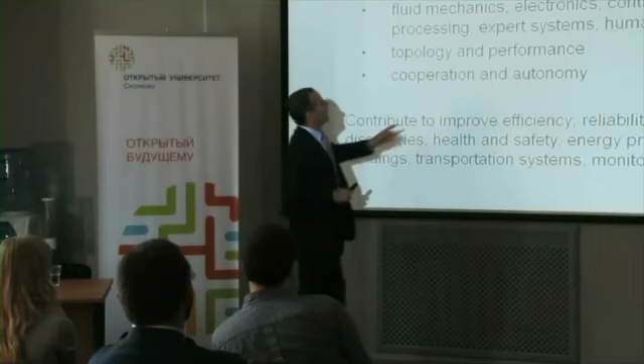And finally, we have to understand that cooperation and autonomy are at opposite sides of the spectrum, but you may have autonomous vehicles which are cooperating all together in order to achieve a common goal. The way we formulate cooperative goals for autonomous vehicles is extremely important, because there is cooperation in space, cooperation in time, and cooperation in space and time. And it is extremely important to understand what type of problems and how to achieve this.

All right, now all these, unlike robotics and autonomous vehicles as they used to be regarded 20 years ago, have to improve efficiency, reliability, availability, the value in scientific discovery, health and safety, so human well-being, production and distribution of energy, smart buildings, transportation systems, medical practice, and so on. So robotics these days has large impacts on the way we live. And whenever I say robotics, I mean a mechanical system with electrical parts, with an interaction with the environment, so a much more complex object than what used to be a robot 20 years ago.

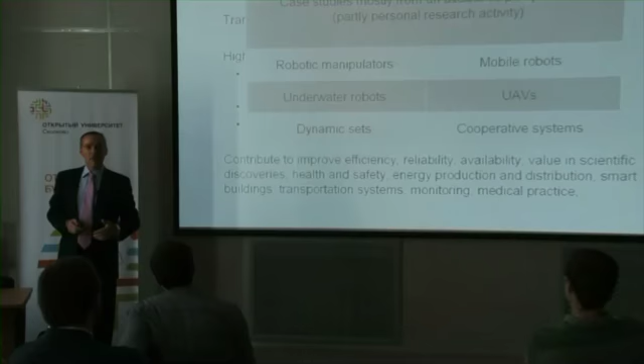Now the talk is essentially based on case studies, mostly from an academic perspective. I'm an academic, and partly on personal research activity, so I've contributed to the development of some of the applications we're going to see. We are going to discuss robot manipulators, mobile robots, underwater robots, autonomous vehicles, and at the end cooperative systems. The first four are somewhat autonomous systems. Then we'll look at an abstract way of defining a cooperative system, and then at a new application called dynamic sets.

To give you an initial idea of what a dynamic set is, think of the clouds. The clouds are moving in space, and they are essentially sets moving. It looks very far-fetched, but we'll come back to these clouds later on. You would like to understand the way clouds behave, for example. But they don't have to be clouds. They may be flocks of birds. You may have an oil spill in the ocean, and you want to understand the way it behaves, or the way a bushfire, which is another set, behaves. Most of these systems are autonomous, but we would like to understand the way they behave.

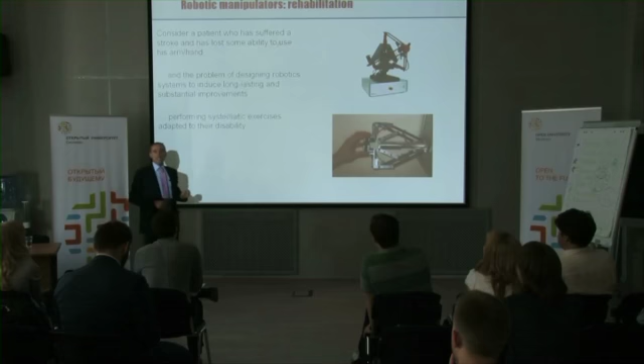Now robotics, robotic manipulators. This is the simplest possible class of robots. But while robots used to be considered simple robots for pick-and-place operations, nowadays robots can be used for much more interesting and much more useful applications.

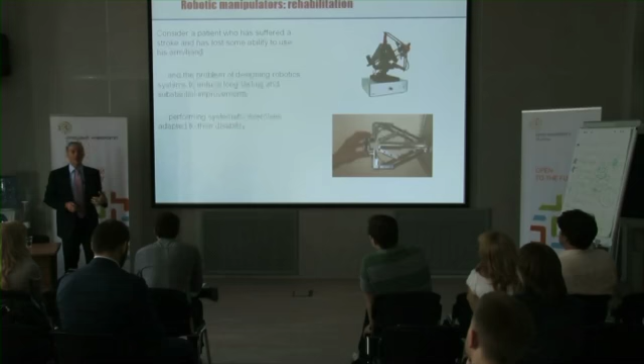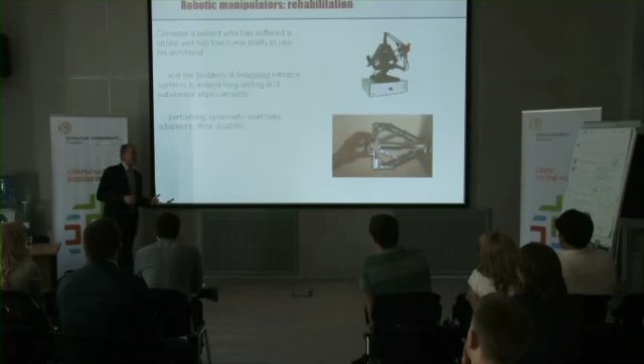Now, suppose that you have a patient that has suffered a stroke, for example, and has to undergo rehabilitation. Now, what happens typically? You have the patient, he has to go to some place, have rehabilitation, and come back. It has actually been shown that the time and effort that the patient has to take to go to rehabilitation and come back, most of the time, is such that the positive effect of the rehabilitation is almost zero.

For example, if you have a problem with your back, you drive 1 hour, you go there, you have physiotherapy, you go back home for another hour driving, and so you wasted your time, because all the time that you have been in your car driving has been bad for your back despite the rehabilitation.

So we want to devise now a little tiny object that you go to your doctor, the doctor will give you, you take it home, like the coffee machine. In the morning you wake up, you have your coffee and you have your rehabilitation. Okay? So this is a type of rehabilitation, which is a very simple robot, where you can put your hand, and this robot will initially move your hand.

So, for example, if you have some problem and you need to start again moving your hand because of an accident and so on, the robot will initially move your hand, and then will sense the force that is applied by your hand to the robot, and eventually what happens, you will move the robot. Okay? So there is a very clear interaction between the robot and the environment.

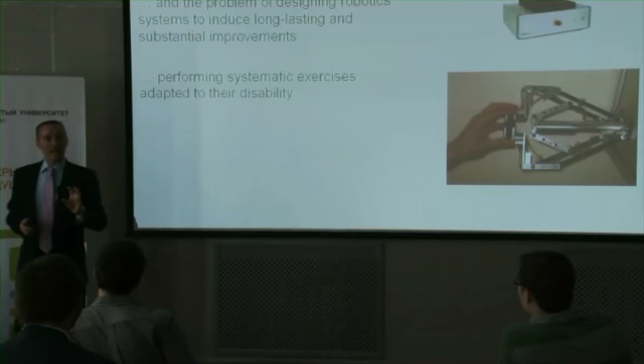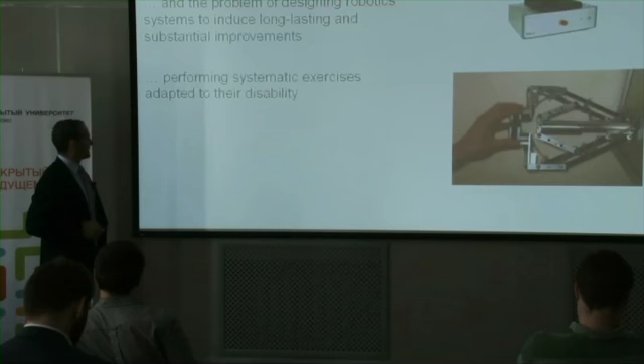The robot will initially be driving your hand because you have no force in your hand, and as you progress with your rehabilitation, then you will be able to drive back the robot. And the robot will be devised in such a way that you can repeat an experiment several times, and in this way you sort of have your rehabilitation at home or wherever you want, in the office, for example, and you don't lose the good effect of this rehabilitation.

So this is the simplest possible example that I can think of a very simple mechanical system. You see, this is actually very simply built, that actually requires a very sophisticated interaction with the environment. You have to be extremely gentle at the beginning if you want to have some success in the rehabilitation, and on the other hand, you want to be able to measure the progress that you are making in your rehabilitation.

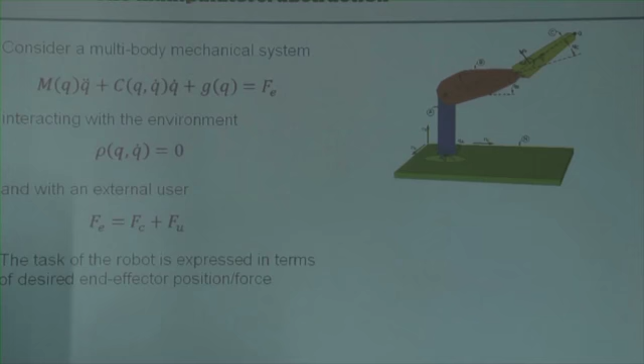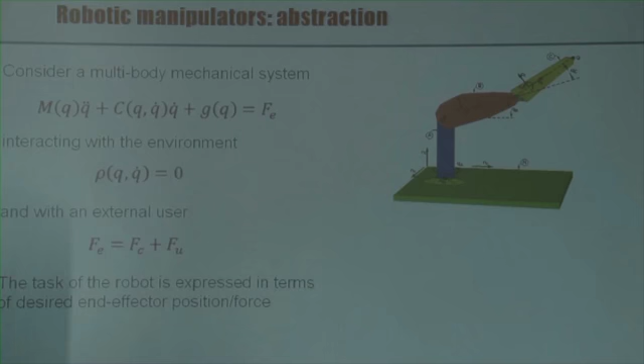So you can touch this table, but you cannot go underneath the table. You can go at some speed, but not all speeds are allowed. And so you have a certain number of constraints which are sort of specifying the type of interaction that you have with the environment. Now, if you want to be able to apply a force at some point, for example, as you touch a table, if you want to draw on the table, you should be able to touch it, to apply a force, but this force should not be too much, otherwise you break your pencil, for example.

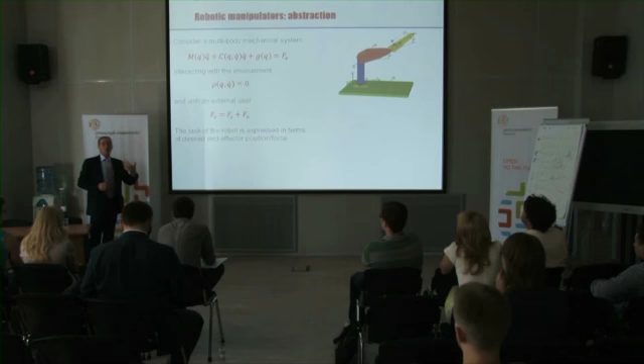Okay, so there are external forces, so Fe are all the external forces, and you can divide these forces into forces which are sort of the control forces and forces which are given by the user. Okay, so in the case of the robot that we have seen before, there may be control loops which are generating forces, and there may be forces which are generated by the user. If you have a mobile robot approaching you and you want to push it away, you want to be stronger than the mobile robot if this is a domestic robot, because you have to be able to avoid, for example, having an accident. Okay?

Now, the task of the robot is typically expressed in terms of a desired position or force for the end effector, which is, in this case, the tip of the robot. In the previous case, you get desired position, velocities, and trajectory and forces for this part here. Okay? So you want to be able to feel that there is a force applied to the robot, and the robot will apply a force back, and you want to be able to move this part in a very specific way. For example, you may want to have rotation orthogonal to the plane. So this is the way you formulate the problem.

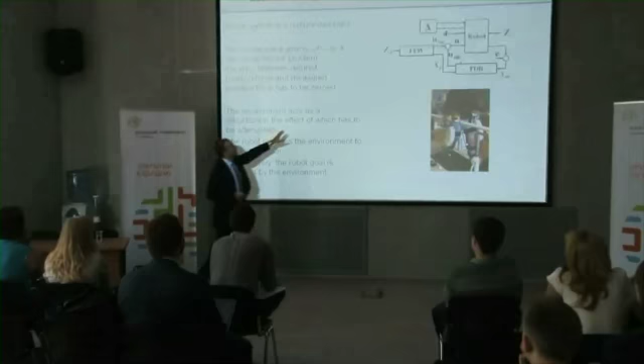And then you have a task, Z, which is the actual task, and ZD is the desired task. And then typically you would implement a feedback loop, which is processing available measurements on your robot and generating a control signal. But then you also have a feed-forward controller. The feed-forward controller essentially will tell the robot what to do in the case that the big delta and the D are identically equal to 0. So if the robot is on the right track, then there's no need for feedback. Feedback is only to adjust performance as you go along. So the goal of the controller is essentially to drive to 0 the difference between Z and ZD. Okay, so this is a very simple problem from a mathematical point of view that we can formulate in a very clean and neat way.

There are two important issues here. First of all, we should be able to solve this problem, but for robots, which are reasonably gentle dynamical systems, it's easy to solve this type of problem. What is actually extremely important is to understand what ZD should be. What is the desired behavior of your robot? It's not only pick and place or move from here to there. The robot should do a lot of other things, should be able to communicate, avoid obstacles, interact with the environment and be useful to the environment, measure what happens in the environment and give information back. So this is mostly encoded in ZD, but it's extremely difficult to understand how to model ZD.

So as a control engineer, I would design the feedback controller, not even the feed-forward controller, but then I need, for example, a sociologist to tell me that if I want to have this useful to a little child that wants to learn how to interact with a pet, then it should behave in a certain way. So a sociologist should tell me how ZD should be defined for this particular application. A medical doctor should tell me how ZD should be defined for this particular application. I want to help a person to start walking again, who may have had an accident.

Now, what happens is that I want to use a robot. You see, this is essentially a robot arm, in such a way that I move the legs as long as this person is not able to move them. But then I have to be able to understand the maximum amount of force that you can use, and when there is a force applied by the patient, what you have to do.

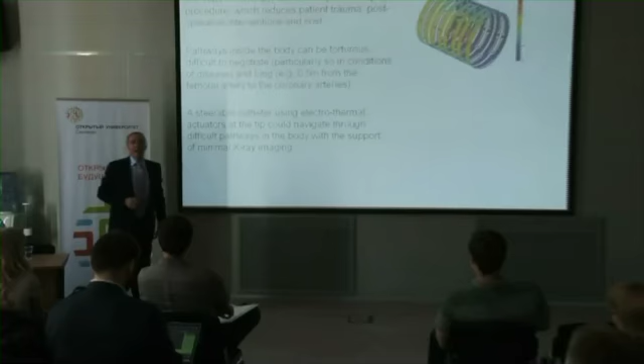Okay, so this is the application that I was discussing at the very beginning, the small application. We have a project at Imperial that is actually dealing with this type of application. This is used in a surgical procedure, and it's actually known that most of the recovery time after surgery is associated with the fact that they've opened you, essentially. So if we are able to perform surgery inside the body without opening the patient too much, but just make a so-called keyhole surgical procedure, then we will reduce trauma, post-operative intervention, and cost. This is extremely important these days.

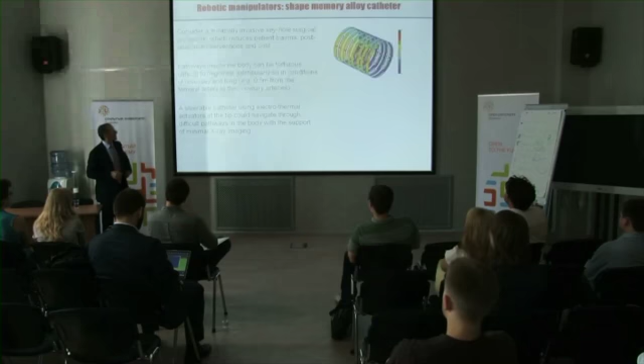Now, the problem is that you should be able to navigate these objects in the body, and typically the access points are in your legs, where you can take an artery, for example, and you want to navigate all the way along this artery for half a meter, for example, to the coronary arteries. Now, you would like to generate a steerable catheter which uses electrothermal actuators. So this is a little wire that will move as you apply currents, because you heat this wire, and as you heat this wire, you generate deformation. And on top of this, the deformation is sort of memorized by this object.

So if you want to navigate along a bend, you initially move in one direction, but then you stay in this direction because you have to move along this direction. So this is extremely important, and you can achieve this goal simply by applying tiny little currents along these wires and then controlling the temperature. The difference in temperature is actually not that big in order to achieve this type of trajectory, because you don't want to hurt the patient.

And so this is actually implementable through a robot, in the so-called master-slave operation. The surgeon will have something like a pen in his hand, and with this pen, he will control the robot, and the robot will essentially follow the path that the surgeon is giving to the pen. This is important because if you think what you are doing while you're trying to insert a wire into a pipe, this is the type of operation that you're trying to do. You're trying to steer your wire, and this is precisely what the surgeon is doing.

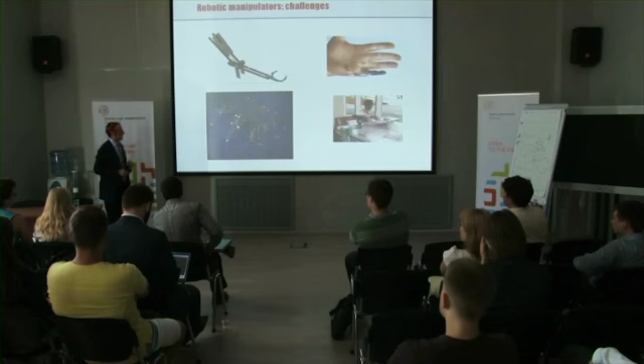Now, we were talking about tactile feedback. This is actually a very new thing and a very important thing, because you would like to have a feeling that you touch the robot and the robot would like to have exactly the same feeling. And this is extremely important because you may have surgical telepresence, so the operator may be halfway around the globe and may move a robot, and then with a proper communication link, you may be able to do operations in some other place.

You may be able to do interaction with holograms, and you may be able to do e-commerce. We all buy on the network these days. But for example, you want to buy a jacket, and you don't want to see only the color, but you want to touch it. Okay, you want to feel the fabric. So this is actually possible.

I mean, you can sort of have a glove, and it looks like you are touching, but the thing is somewhere else. You don't even know where it is actually. Okay, and of course, preliminary objects are these iPhone or smartphone types of things. A lot of games.

If you think of video gaming, when I was a boy, video gaming was a tiny little thing that you had in your hand. You were sitting alone on the sofa playing the game all day. Now, these days with the Xbox or the Wii, you are jumping all over the place with a lot of other people and so on. So this has changed significantly because you have this feedback.

Okay, so because these robots are able to understand where you are, you have a sort of tactile feedback, and you can use this type of interaction. So these are two examples of haptic interfaces. One is to drive a car. So you are driving this car, but you are not there.

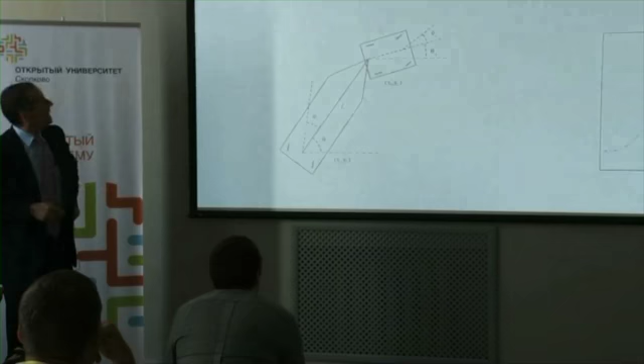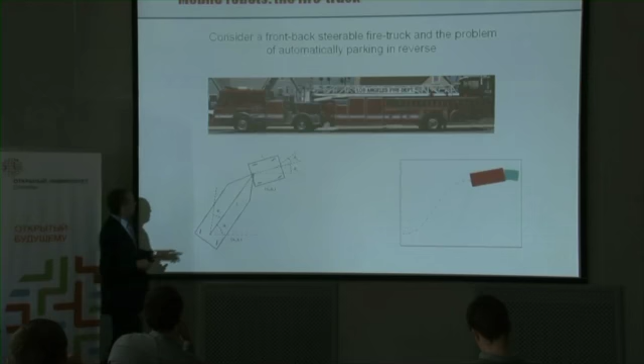Okay, now the second part is mobile robots. So a very interesting type of mobile robot is this American fire truck. Why is it very interesting? Because this is so big that you can steer the wheels here and you can steer the wheels here. So this is very good because if you want to go around streets with such a huge vehicle, it's extremely useful to be able to steer these wheels. So in practice it is to help you steer along the road.

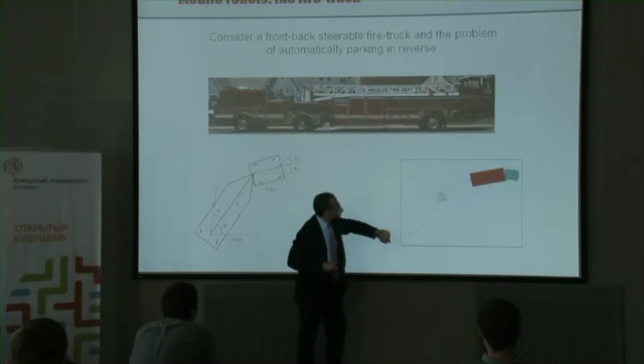On the other hand, driving something which has steerable wheels, fixed wheels, and steerable wheels is extremely difficult. And the type of motion that you have for this system is actually very unnatural. So if we could please play this video, you'll see that it goes on the way back in a very unnatural way. It's not the way you would go with a lorry where you cannot steer this; it's very unnatural.

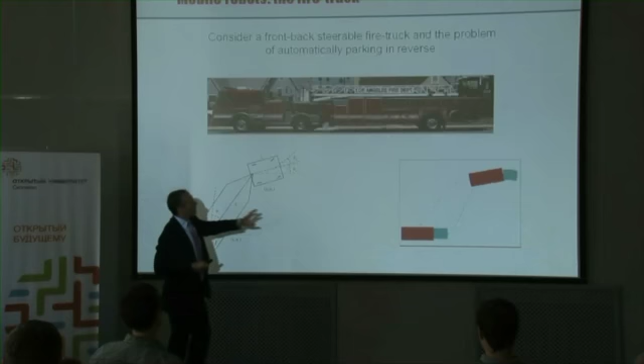And this means that typically there is an operator driving here and an operator driving there, and they have to communicate with each other, and they have to be very smart and very experienced in order to park this type of object. On the other hand, you can park this automatically. You can design a controller that does this automatically, which makes use of a differential model of this system, typically a kinematic model because this is a geometrical problem, and from this differential model you find the controller.

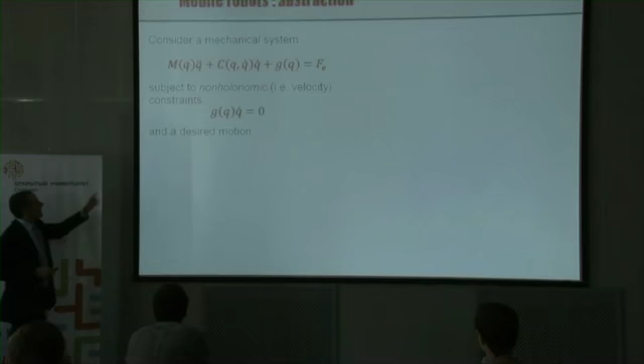Now, how do you describe this? Well, the mechanical part is pretty much the same, but the type of constraints that you have for mobile robots are completely different, because for mobile robots you have so-called velocity non-holonomic constraints, which means you're not constrained in the type of configuration that you can reach, but you are constrained in the way you move. When you want to park the car, we all know very well that you cannot just park it sideways.

There is a constraint, which is a velocity constraint. With your car, you could go wherever you want, but you cannot go wherever you want with every possible trajectory. There are feasible trajectories which are satisfying these constraints, and there are trajectories which are not feasible. Typically, the type of constraint is that the velocity orthogonal to the wheels should be identically equal to 0. But since you steer the wheels, this is a constraint that will change as you change the

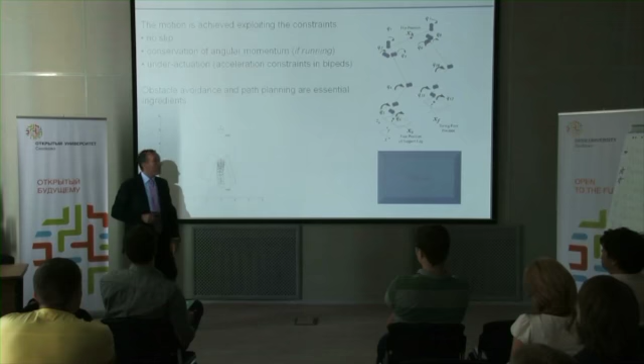If you have a walking robot, so you don't jump, you always have feet on the ground, what happens is that here you have a constraint. This foot has to be on the ground. And on the other hand, this is completely free. So you see that you have a kind of manipulator, a robot with a lot of links, where you have a constraint on the acceleration on this foot. But then as you do a step, everything changes, because the constraint now is on the other foot and so on. So you have what is called under-actuation, because there's something that you cannot move. There's something that has to be on the ground. So this is a very simple example of a mobile robot.

Could you please play this video? Yeah, okay. No? Okay. Sorry. Click again, click, yeah, okay.

All right, so this is a walking robot that has been developed at the University of Michigan. And actually this robot has won... you can take the volume off.

So this robot has won the prize for the fastest walking robot that has been designed. This robot is very heavy on the torso and very light on the leg, because we probably all know from experience that you can walk very fast if you have a lot of weight, for example, if you have a rucksack, but it's very difficult to walk very fast if you have very heavy legs. I mean, if you put skiing boots on your feet and you try to run, then you really have a problem.

Okay, so it is important to have this type of configuration if you have a walking robot. Now, the lateral support that you have for the robot was simply because you're not interested in the lateral motion of the robot, but only in this motion.

Now, the other important thing that you want to do is obstacle avoidance and path planning, because it's all very well to say that I have a starting position and a final position, but all of a sudden I have some obstacle. And this obstacle may be time varying. Someone may be shifting a chair, maybe moving something. So your robot will try to go from here to there. If it's a robot that has a few sensors, it won't hit the obstacle, which is good, but will not be able to know what to do.

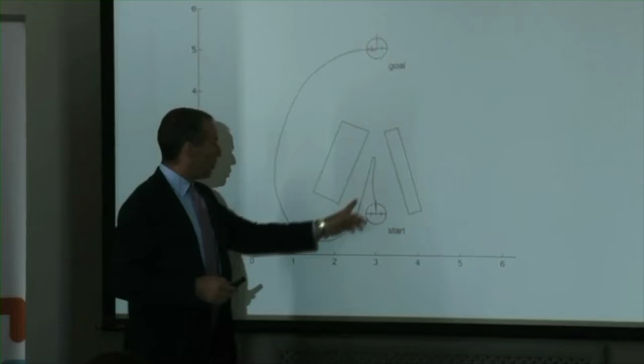But then this notion of distance has to be changed as you move in the presence of an obstacle, because the obstacle will generate, for example, if you have some sensor, a signal that you have to use in order to modify the notion of distance. So if you are close to these two obstacles, even if physically close, you're actually very far away because you have the effect of the proximity to the obstacles. So your robot should be able to get closer to the final goal while navigating away from the obstacle, and it will do something like this. And you can do this in a much more sophisticated way as you get more and more complex tasks.

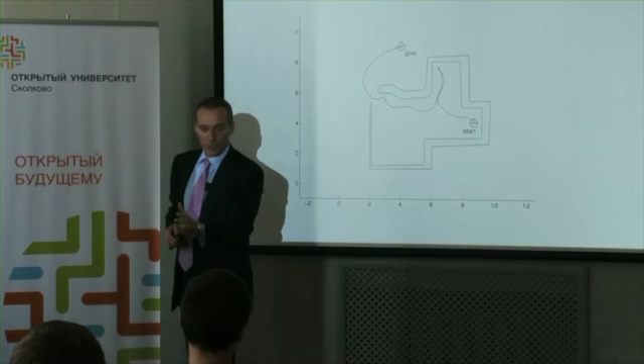The robot will initially try to go along this straight line. Of course, there will be some noise because of the sensing, and then it will be tricked into this position, but then it will figure out that there is no way out and will come back. All this is autonomous. You only tell the robot that you want to go from here to there, and you have three sensors, one in front, one to the left, one to the right, that are telling you whether you are close to an obstacle. You have only three sensors because this robot only goes forward, it doesn't go back.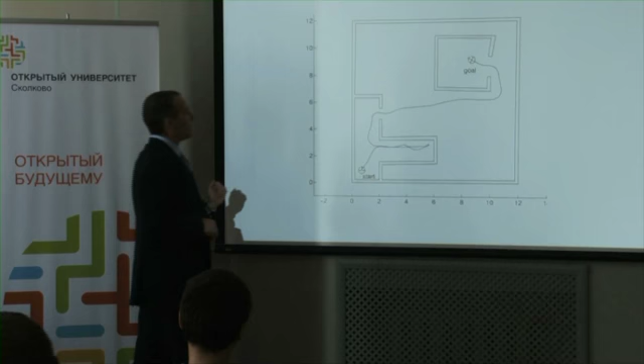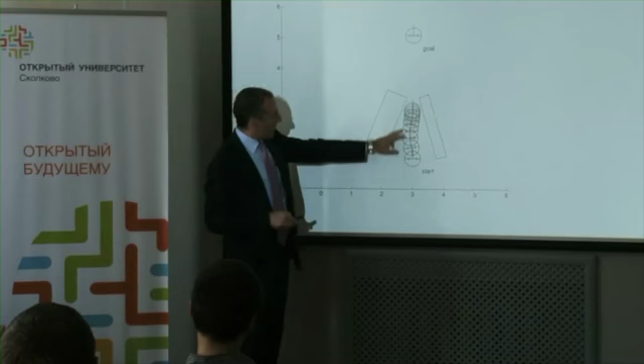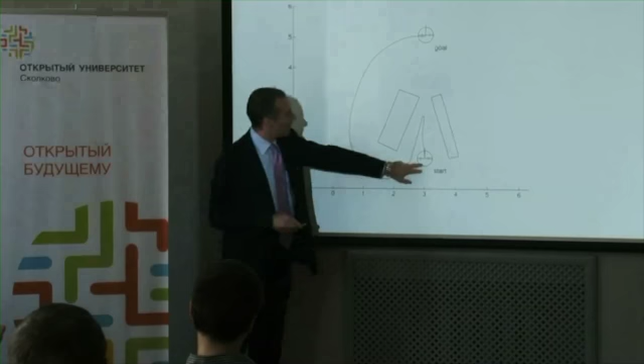And then you have a slightly more sophisticated task, and a slightly more sophisticated task, and finally you have this type of task. Okay? But now you would think, okay, this is an academic example, and of course you can devise a controller that achieves this goal. Keep in mind that from this situation to this situation, we have modified the controller. We have defined a new notion of distance, which takes into account the effect of the environment on the distance. But from here to there, we have not modified anything. It's always the same robot, always the same type of controller. So the robot is able to understand that there is a dead end, come all the way back and achieve the goal.

Okay, actually there are so-called micro mouse competitions, which are for students your age or even younger. So the problem is to devise mobile robots, mice, to compete against each other to solve a 16 by 16 maze in the shortest time. You have no information on the maze. You only know that it's 16 by 16, and you can use whatever you want.

So if we can play these two videos together, this one and this one. So you see, okay, forget the music. And okay, we play the other as well. Sorry, can you play this as well? Sorry.

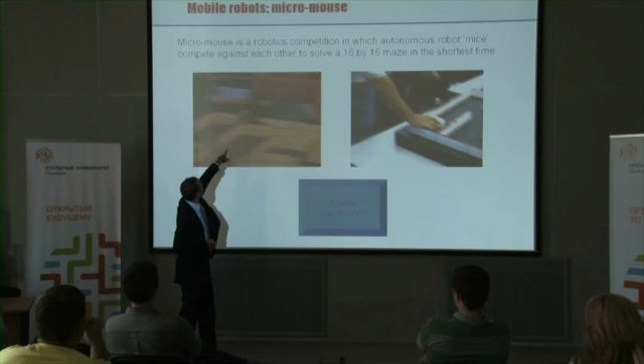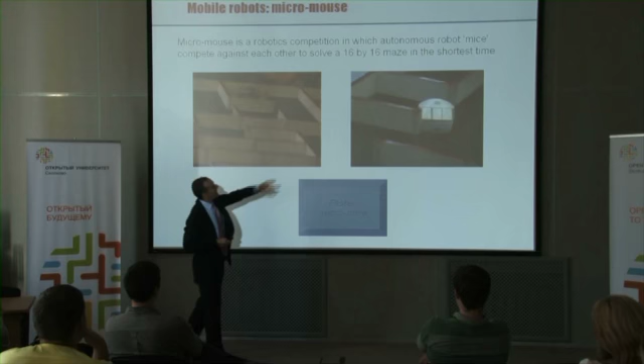Okay, so this one is actually trying to follow all walls. This is actually a mouse, an old computer mouse, as you can see. So it's a real micro mouse, if you think of it. And the behavior is pretty much the same. I would say that in both cases we have very poor design.

Okay, sorry, stop and play this one now.

Okay. All right, so these are actual, much more sophisticated mice. Unfortunately, the quality of the video is not that good, and you cannot even see this micro mouse. And it reaches the goal in 11 seconds. Okay, and if we are patient, then let's see. This one actually is not that good.

All right, so you see that it's going everywhere. Okay, sort of a complete search. It's a very fast mouse, but not very smart. Okay, so you see that it's going inside all of them because the center is somewhere there. You see, that's not good. It will try, and then it will find the right opening and reach the goal after that.

You see, so it's essentially tried them all. It's not very smart, it's very quick. Okay, so now it's gonna make it. And you see that this mouse is very good on diagonals, it's not very good on straights. Yeah, so it's back where it was before, but now it gets a bit smarter. It's learned a bit of a lesson.

So we cannot really see it. Where is it? Yeah, here it is. Now it will navigate inside. It has to take this, yeah? All right, now it's good. Okay. Now the next one will probably take 5 seconds, or probably 8 seconds. So it is really amazing.

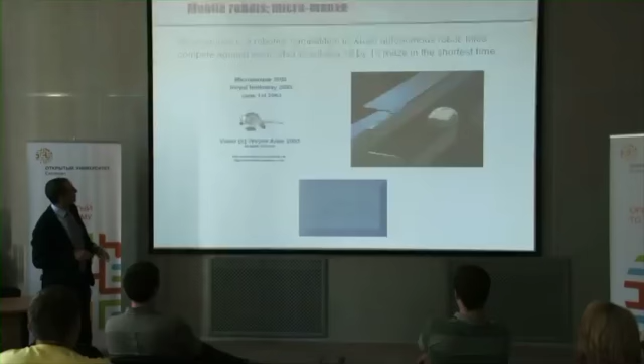Okay, you can stop and go back to the slide. Oh, sorry, no. Next slide. Yeah.

Okay. Right, now, mobile robots. So, we have seen a game, this micro mouse competition, but actually they can be useful in a lot of other applications. So, one robot that I personally designed with the help of a lot of colleagues is a robot for a data center. Now, in Rome, there are several data centers, but the one that is taking care of the Italian railway system, and you shouldn't blame me if the railway system is not efficient in Italy,

is composed of 12 rooms. Each room contains approximately 6,000 servers, and each room is much bigger than this room, but they are in corridors, and you have 6 servers per pile, so you have 1,000 piles of servers for each room. And then what happens is that during summer it gets very hot, and you want to use air conditioning in a very good way. Now, to use air conditioning in a very good way, you need to measure the temperature of each one of the servers.

Now, the dumb approach to this is to have 6,000 sensors to measure the temperature throughout. But actually you don't really need the temperature every couple of seconds for each server, you just need a robot which will go around and will measure all the temperatures. Now, you really have large temperature variation in this type of room, and if you use air conditioning in a very good way, you can save hundreds of thousands of euros a year. So this is a very worthwhile application.

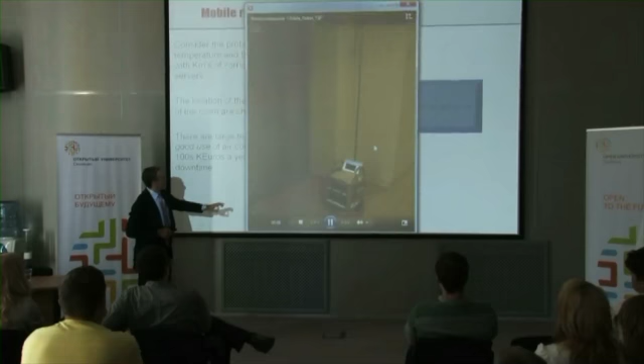Okay, so this is completely built in the university. So it's a very small mobile robot, and the black path is the path that it has to follow. Why follow a path? You could use a GPS. Why don't you want to use GPS? Because you will have a lot of interference. You don't want to have Bluetooth, you don't want to have anything like this because you have all these servers which are running there.

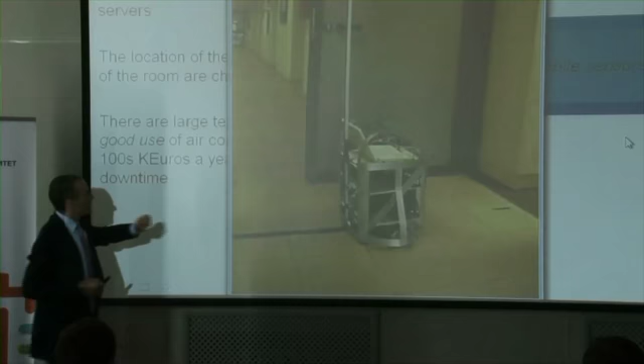Now you have to keep in mind that for this application it doesn't make sense to have a very fast robot, because a very good temperature sensor will actually measure temperatures in 10 seconds. Because you have the temperature of the air, you have to take care of the fact that you reach the steady state and so on. So it's important to have a very good temperature sensor, but then you have to be slow, because if you move, the temperature sensor will not reach steady state, and then what you measure doesn't make sense anymore.

Okay, so let's go to new slides, please. Now, another important problem in robot control is to understand where you are. So you have a robot moving in an environment, and typically you have information from a camera. You can see your robot, but you want to understand how far away this robot is. So this is called the range identification problem, where you have 3D information. The robot is somewhere in space, but you have 2D. You want to reconstruct 3D information from 2D information.

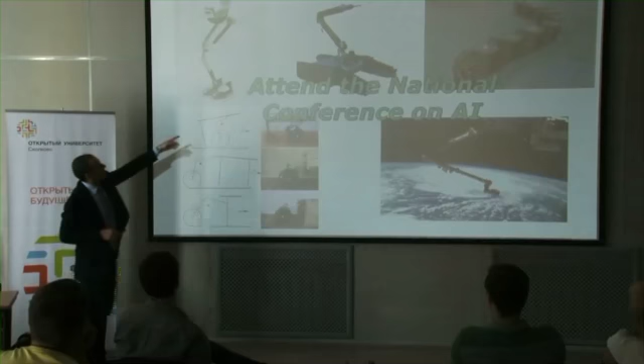Okay, now what are the challenges in mobile robots? So you want to build mobile robots for all sorts of applications. So these are rescue robots, both of them. Then a mobile robot is pretty much like a robot in space, because while for a mobile robot you have velocity constraints, also here you have velocity constraints and conservation of angular momentum and lots of types of conservation. Then you would like to have domestic robots.

You want to close a drawer, you want to shift a table, you want to shift a box. Then you would like your robot to help you with this task. Again, this is very useful if you have an elderly person at home and they're not able to perform very simple tasks, for example, to move a table or to shift something, and so the robot may help you.

And now there is an international goal, which is to have a robot which is able to attend a national conference on artificial intelligence. So the robot should go there, should register. If you go on the web, there is a long list of specifications that this robot should be able to achieve. And one of them is to attend lectures and ask questions. Now, this is probably a bit far-fetched, but it is the goal that we want to achieve.

So, as a summary for mobile robots, we have expert systems, artificial intelligence, communication, control, smart sensors, and so on, an interplay between all these disciplines, and the beneficiaries are again medical robotics, exploration, monitoring, rescue operations, manufacturing industry, smart buildings. You want to measure temperature and the environment.

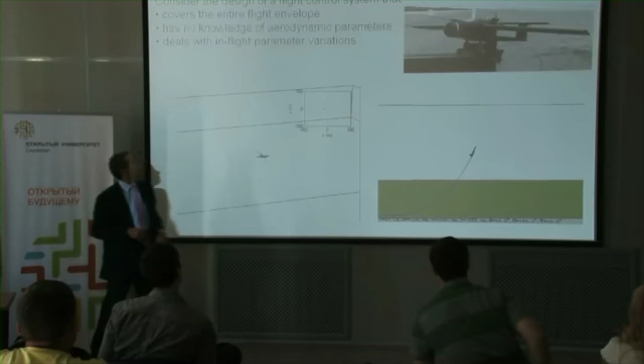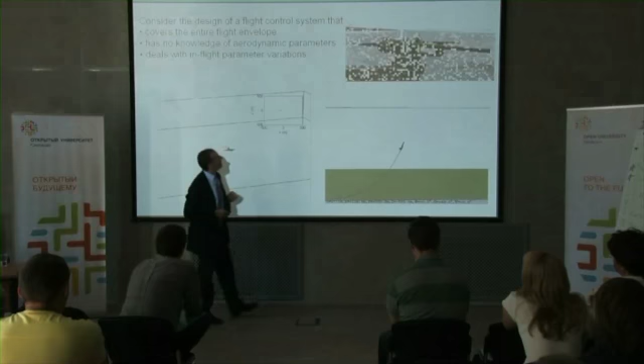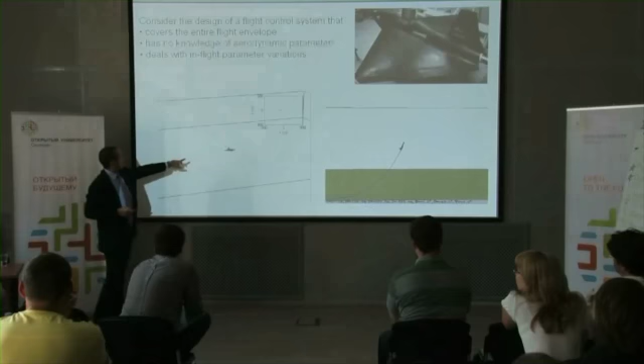Okay, now the next step is flying objects, autonomous vehicles. So suppose that I want to design a controller that works for this type of small model, which is an XRA 140. It's not even able to take off, so essentially you have to launch this aircraft and then it will fly, or for the Eclipse type of aircraft that is developed by British Aerospace. So these can be even used in military action or in rescue operations. Now, there are a couple of challenges, so if you can play both the videos at the same time, please.

So you want to be able to navigate across an obstacle without knowledge of specifics of the obstacle, but at some point you would like to have a change in your attitude. So you don't want to have any overshoot. Now the other objective that you want to achieve, can you play this left video, please?

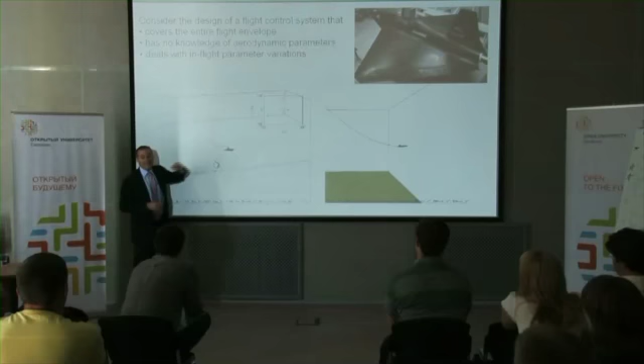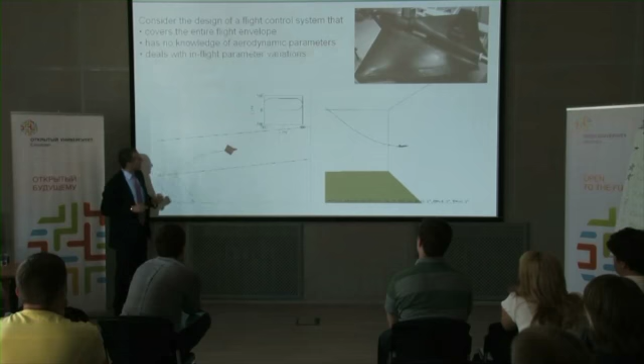Yeah. Okay, so you want to take off with the same controller. Then you are at some altitude. You have a bend, 180-degree roll. Of course, you don't want to fly on this plane. And then it will resume normal flight and will have a very sharp figure-8 type of trajectory. So you go back where you took off, and then you have this type of behavior.

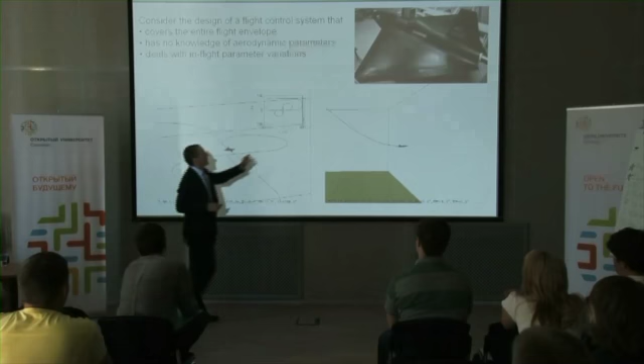All this has to be achieved with a unique controller. Okay, so you don't want to have gain scheduling, you don't want to have several controllers, but you want to have a unique controller. In addition, you would like to have a unique controller for this object, for the other object, and you would like to have a unique controller for all types of aircraft. How is this possible? Okay, let's try to go back to the specifics of the problem.

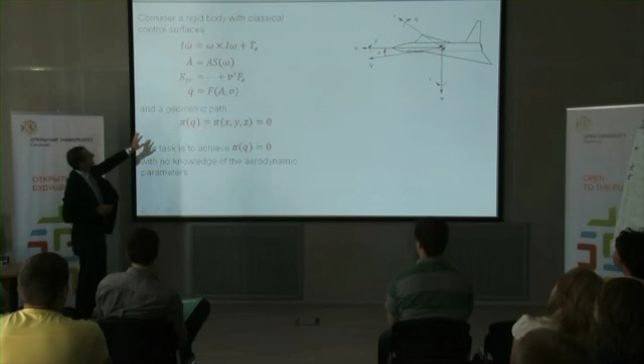So if we have a rigid body moving in space, classical mechanics tells us that we can model this with differential equations. We have the Euler equation for angular velocities. We have the attitude, which describes the rotations of the body with respect to a reference frame. So A is an orthogonal matrix. We have variation of the kinetic energy of translations, and then we have the actual position in space.

As you see, the actual position in space is a function of the attitude and of the velocities of the object. And then we have a geometric path. So a line or a circle or whatever, which is specified in terms of a constraint on the x, y, and z coordinates, which are the 3 coordinates of Q. So our goal is to make sure that we are on the path. Okay, so you have a flight path and you want to be on that path. So this is pretty much an idealized object, but actually we want to be able to use this approach for all these types of objects.

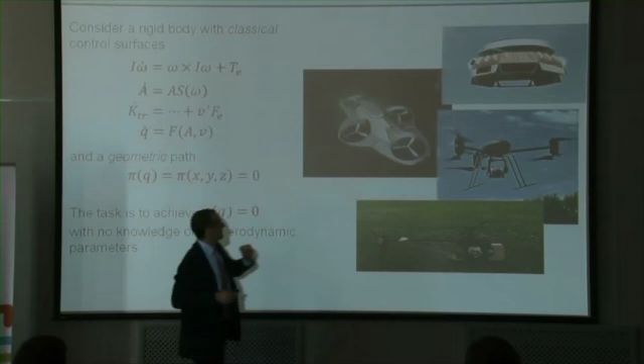And now, what is the important difference here? So what is the object-specific part of this particular type of application that shows up in the equation? Now you see that it is the actuation, the way you make this object fly. So this is a classical actuation, for example. This is non-classical actuation because you have all these rotors. And this is, again, you have 4 rotors and then 1 over there. So you want to be able to design something which is useful for all these types of aircraft.

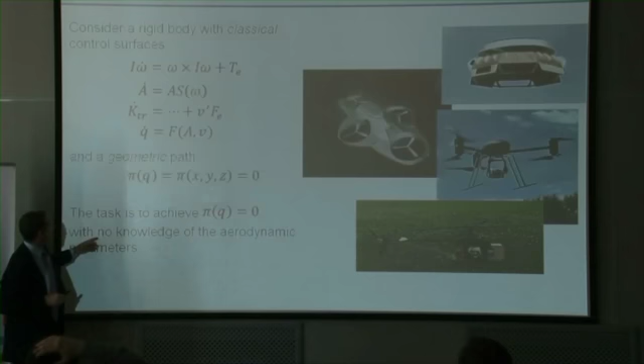So the challenge is really that you don't want to have any knowledge on the so-called aerodynamic parameters, aerodynamic forces and aerodynamic moments, which are the TE and the FE. So the way this object interacts with the environment. So what you do, you pick one of these objects, and then you design a UAV-dependent feedback. Okay, so for each one of them, you have a specific feedback. This is not good enough.

So you want to be able to learn which one of these particular flying objects you are taking into consideration. You have what we call the universal learning mechanism, and now you can close the loop. You learn which type of vehicle you have, and you now use a UAV-independent feedback. So this feedback, together with the learning mechanism, will work for any one of the vehicles over there.

And then, in the particular example, the UAV-independent feedback and the learning mechanism will be split into an airspeed control, which essentially tells the forward speed of the object, and the attitude control, the way this object rotates in space, and then you have a path tracker, which achieves the final goal. So let's see a couple of challenges for this. This is actually a very tricky operation.

You have a carrier in high seas, and you would like your helicopter to land on the carrier. In high seas, you will see that there is an oscillation here. Okay, so the deck of the ship will go up and down. So before going down, you have to synchronize your helicopter with the motion of the deck. And you have no information on the waves. Actually, you can have some information on the waves, but typically you don't have lots of information.

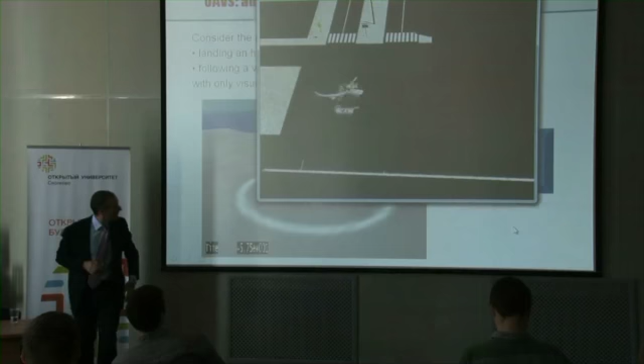So this helicopter has to follow the red mark without knowing what the mark is doing and with an eye on the environment, okay? So it's extremely difficult to navigate in a city, and you want to follow this car. I hope the quality is reasonably good, right?

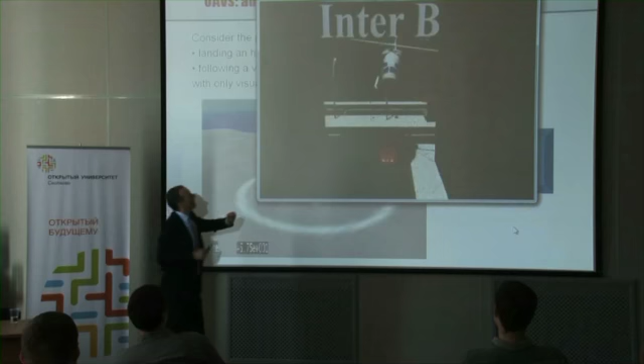And so you see that sometimes the helicopter does some very strange motions because there is an abrupt motion of the target, and you can pose this as a control problem that the shadow of the helicopter should be on top of the car. Okay, so this is your error. There should be one on top of the other, and then you need to follow this. Okay, so we can stop the video. I mean, it's a bit longer, but this is essentially giving you the type of information that you want. All right, thank you.

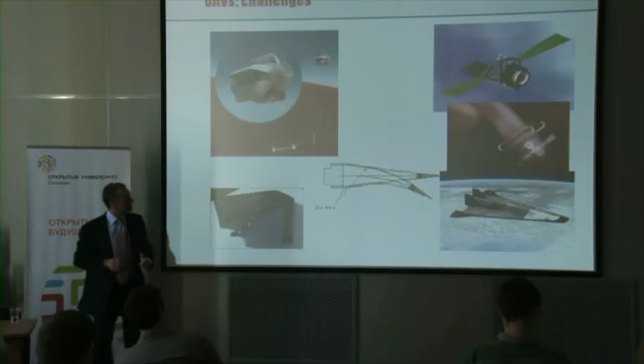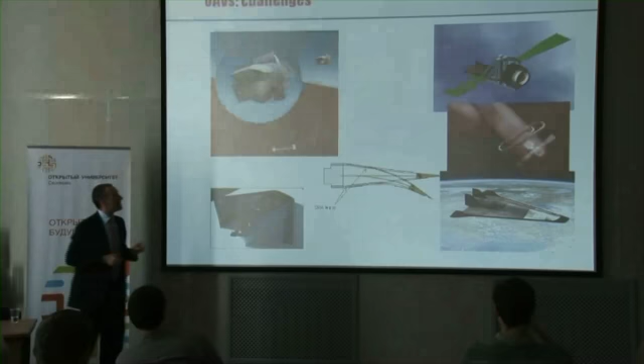are deployed and so on, but they're much more concerned who is outside that door, because this is much more dangerous. So if they could have a couple of these little flying objects, like flies, and throw them, and these objects see what is around the corner or outside the door, it is going to be extremely useful. And so it is possible to design this tiny little object. This is a paper clip with a tiny camera to achieve these goals.

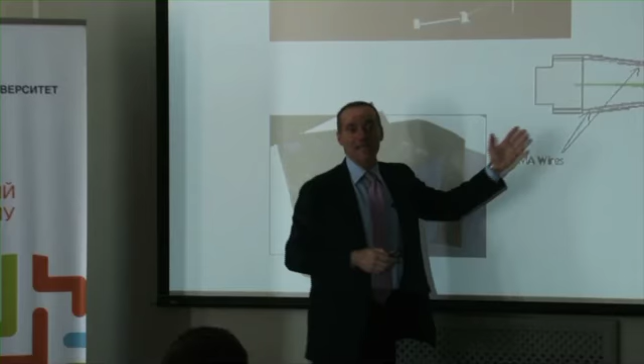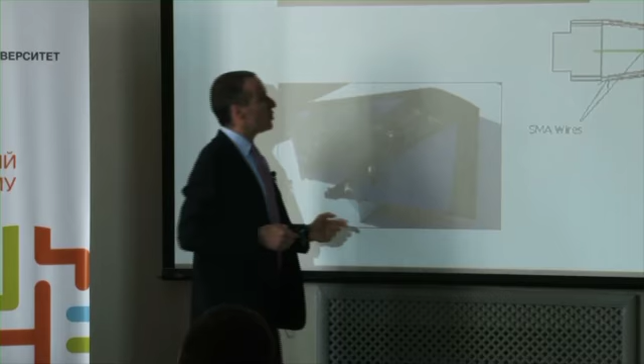And now we've discussed actuation. Okay, so this is a scramjet. It's a jet that is supposed to go at Mach 10, and the motors are being developed. Now, talking about actuation, I say that most of these robots, most of these vehicles are using classical actuation. So you use rudder, ailerons, elevators, and so on. But actually, you could use shape memory alloy in order to modify the shape of the wings to reduce turbulence.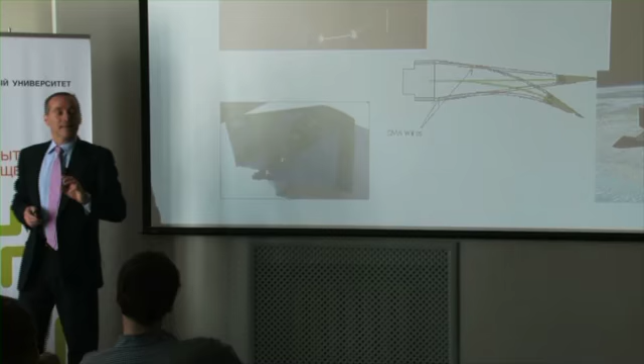And something that has been used, and I've done some work on this, is to use small jets of air in order to reduce turbulence on the wings. So it has actually been shown by Airbus that you can reduce the amount of drag, and so the fuel consumption significantly, if you use these little jets of air, because they are able to destroy turbulent flows along the wings.

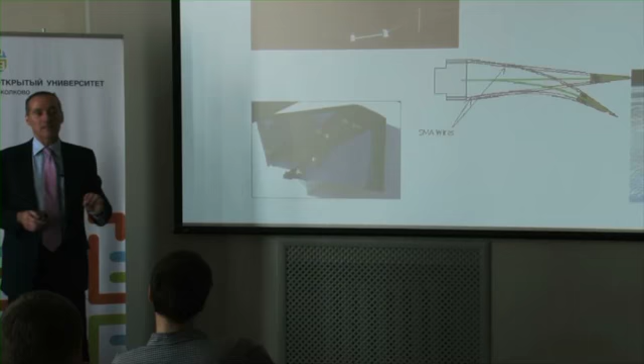So UAVs require computational fluid dynamics, aerodynamics, visual feedback control, planning, micro electromechanical systems. You have to have knowledge of chemistry, structure, advanced materials, and so on. And you can have beneficiaries in wind power, commercial aviation, the defense sector, monitoring, supervision, video games, toys, and so on. So all these types of defense applications will eventually filter down all the way to toys. Okay.

All right, now we go underwater. So now we have a problem, and we all know what a submarine is, and the submarine is controlled in a very simple way. We want to have a different type of submarine. We want to have a submarine that will go all the way across the Atlantic, for example, with minimum interaction with the environment. Minimum interaction because we want to reduce pollution, we want to reduce any action on this.

And so we want even to be able to have a vehicle that doesn't have any moving surface outside. You don't want to have elevators, rudders, ailerons, or moving fins. So the only things that you can move are inside. So you can move a mass inside, which means you can move the position of the center of mass of this object, and you can pump water in and pump water out.

Now, why do you want to do this? Suppose that this object is naturally buoyant, so it's somewhere in the water in this position, and then you move the mass forward, then it will tilt, and it will go down, right? Now you have to make it come up.

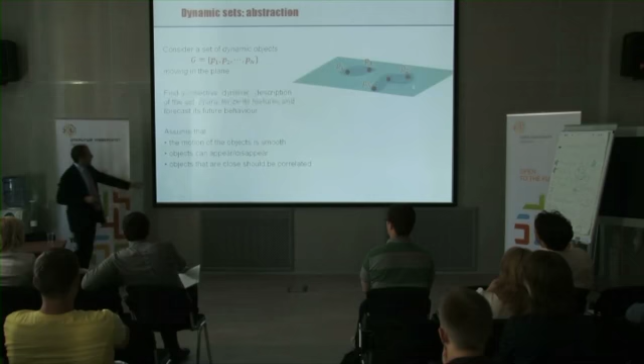How do we formalize this? Well, we have a set of what we call dynamic objects. So these are moving in a plane for simplicity. And then we want to find the collective dynamic description of the set, not of the object. And then we want to be able to forecast the future behavior of the set, not of the object. Now we may make some technical assumptions. But what is important is that the object can appear and disappear. Okay, so if you have a flock of geese, one goose can decide to stop at some point. So you cannot really track each single one. You have to track the shape.

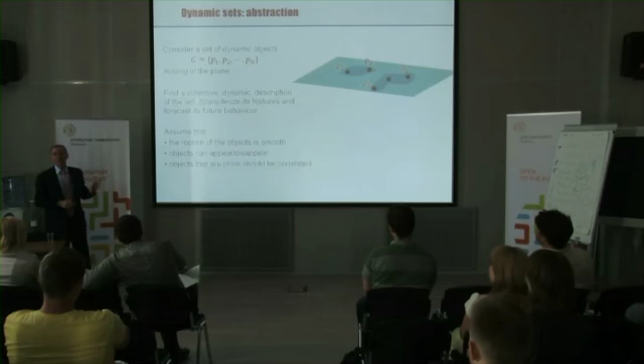And then you want to have a notion of correlation. Objects which are close, in whatever sense of closeness we can think of, have to be correlated in some way. They have to belong to the same set. So this can be done in a very simple way. You can construct, for example, Gaussian functions. This is not really a probability density function because it doesn't have all the properties of a probability density. But you can think of it like the probability that an object is in a particular region of the space. For each one of the objects, you add all of them together, and then you have a clustering function. And then you slice this function.

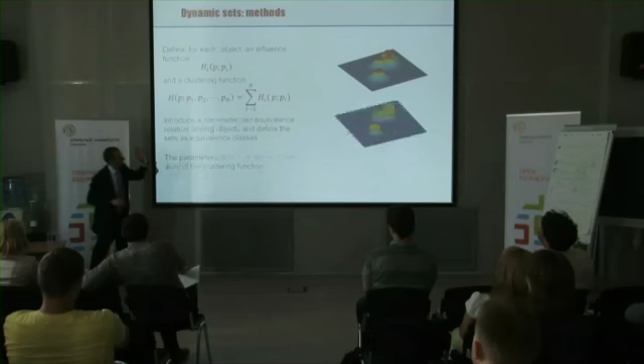You see? If I slice this function, here you have a set, and this set is telling me that 3 objects are close, and this object is somewhat isolated. This may change with time. Okay, so the objects can move, and this one can go together with this, or one of these can go far away. So we want to model this situation. So the parameterization is done in terms of level lines of this clustering function. So if you have a flock of geese, then they do clustering at a very fine level. Each one is an individual object, or you can do clustering at this level. So you have a formation, a typical V formation, and then you have 3 singletons that are essentially doing something different. They may change as time goes by, but this is the way this is behaving at this particular time.

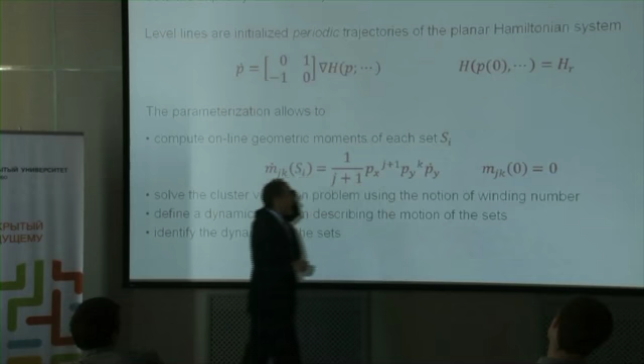Now, what is the advantage of this type of description? The advantage of this description is that you can use the theory of Hamiltonian systems. So this is a Hamiltonian system to describe trajectories, okay? Because Hamiltonian systems are conservative systems, trajectories will evolve on level lines of the energy functions, and exactly if you initialize your object on a level line, on your trajectory, you're always going to stay there. Then, on top of this, you can compute geometric moments. So you can compute the area, you can compute the center of mass, you can compute the sort of ellipsoid approximating this set.

And then you can solve the cluster validation problem, which means which object belongs to this cluster, and then you can define a dynamical system which describes the motion of the sets. Okay, now we've done an application to clouds. That's what I was discussing at the very beginning.

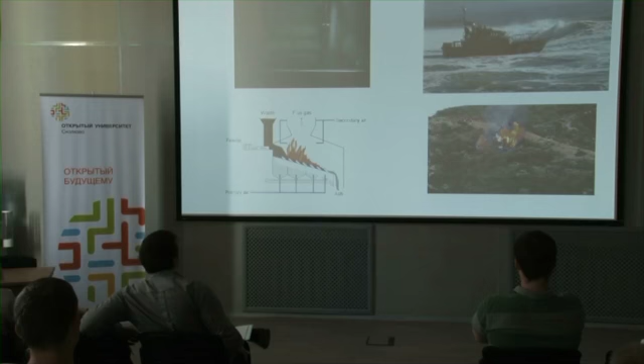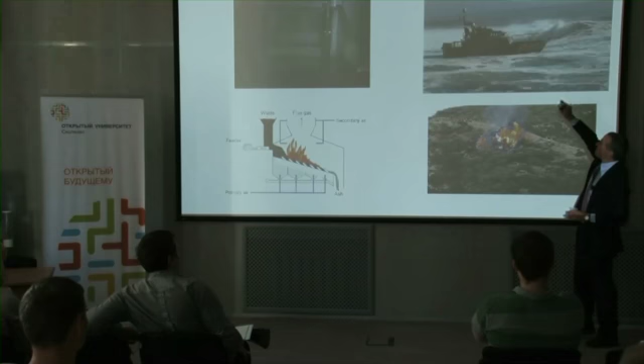You want to track the shape of a flame in an incinerator process, because you know that you are dealing with waste if you burn them in a special way, and the flame has a special shape. You want to be able to recognize objects at sea, for example, from a possibly non-clear image. And now this is a very interesting application. The video is not very good.

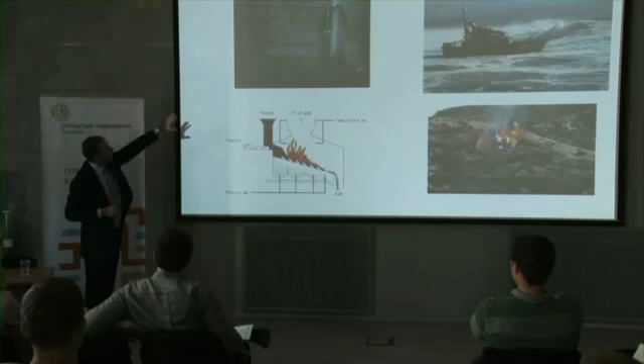This is a set of mosquitoes. Now mosquitoes, malaria mosquitoes, which are extremely important to control, they move in a very special way. So the idea is that they generate a cloud, and you would like to cluster the cloud in order to understand what is their natural behavior and to modify this behavior in such a way that they don't reproduce. Now, unfortunately, the video is not very easy to see, but if you play it again, please. Can you play this video here?

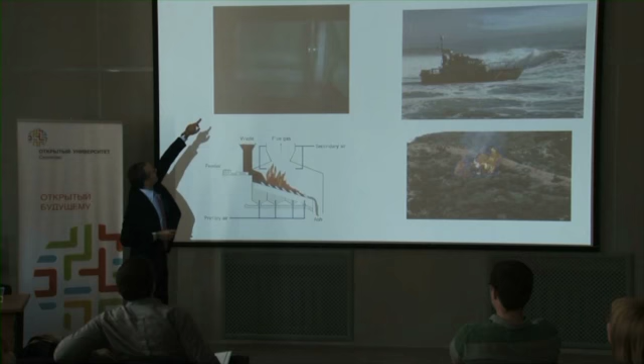So, well, the male mosquitoes are all flying in the center, and the female mosquitoes are somewhere on the side. Then when they decide to reproduce, the female mosquito will jump inside, but they will jump only if the males have a special shape. Okay, so if the males have a special shape, a nice shape, then the female will jump into this circle. So this means that if we are able to recognize the good shapes and the bad shapes, we are able to prevent malaria mosquitoes from replicating, which means we are controlling mosquitoes, not malaria, which is a much better way of approaching the malaria problem.

Okay, now the type of tools and technology: we have signal processing, databases, expert systems, smart sensors, and dynamical systems, but very strange dynamical systems, like systems on sets. And then beneficiaries may be the police, coast guard, firefighters, waste to energy processes, typical processes, malaria control, weather forecast.

Okay, so this is the last part of this presentation. Now we know how to understand the motion of a group of objects, and now we want to make sure that they move all in order to achieve a goal. Now we define a notion of consensus. Consensus means they all agree.

Actually, the notion of consensus is very weird. I mean, inside this room, if we decide to go somewhere tonight, it's impossible that we all agree. Okay? I don't think we'll ever have a group of people who are agreeing. So you have to approach the problem from the other end. You have to minimize disagreement. Okay? So this is extremely important in the notion of consensus. You don't reach consensus, you minimize disagreement.

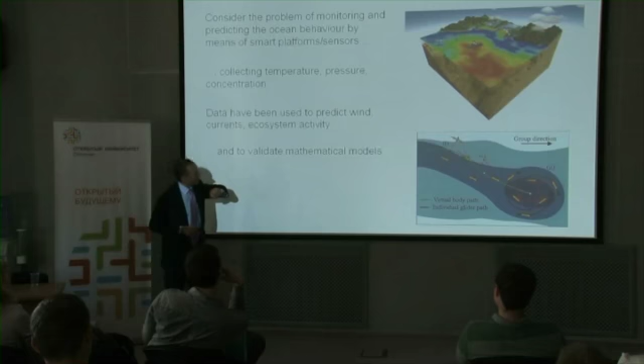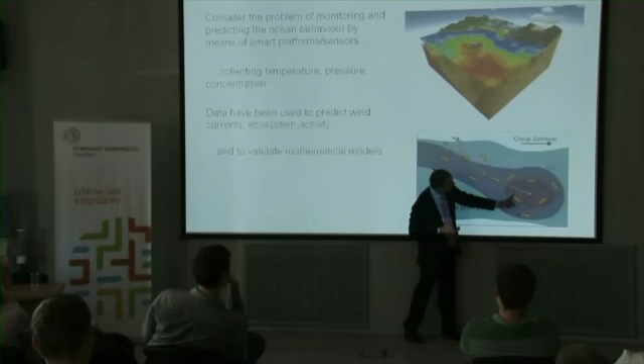Okay, now, another application is ocean sampling network. You have a group of objects and you want to have a specific trajectory for the group, but not for the single object. We have seen that these objects have very strange trajectories. They have to go down, and up. So if you go back and look at the trajectories of the single object, these are actually not very useful. You see that the black lines are the trajectories of the object, but overall this formation will actually be doing a good trajectory.

Now, consensus, collective behavior. So you have consensus, which is agreement in space, synchronization, which is agreement in time, and then rendezvous, which is agreement in space and time. You want to meet someone at a specific place at a specific time. It doesn't matter whether you are both in the same place at different times. It's completely irrelevant. Or you are in different places at the same time. Okay? So these are three types of collective behavior.

So this is a structure that is composed of cables and struts. Struts are pieces of metal, typically, that you cannot bend, whereas the cable, you can sort of extend. So these are fixed length, fixed shape, and these are variable length. And then you would like to have a continuous deformation from one position to another position. So you can reshape this with the constraints on the struts, but you don't have any constraint on the angles from this position to this position.

And that way you can build very huge objects. I mean, if you see all these types of objects that sometimes are built for exhibitions, these are built precisely in this way. Okay? Okay, so as a summary, consensus control, you have communication algorithms, typically gossiping, graph theory, topology, and material. And you can have applications in the environment, biology, oceanography, geodesic domes, which is one application of the tensegrity structure, monitoring, supervision, fire monitoring, weather forecast, and so on.